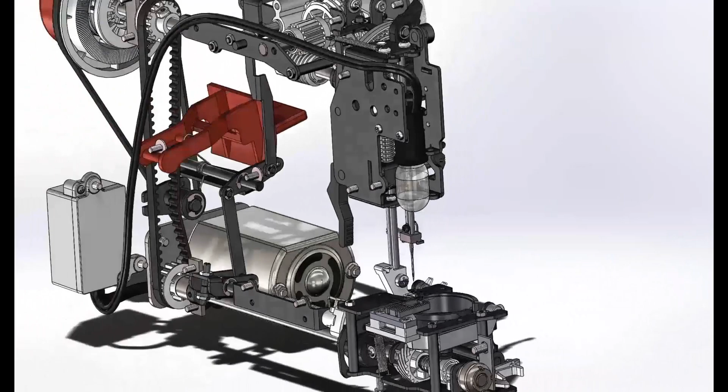When zooming in on the presser foot assembly, we see that this handle uses a cam and follower design to raise the foot away from the fabric.

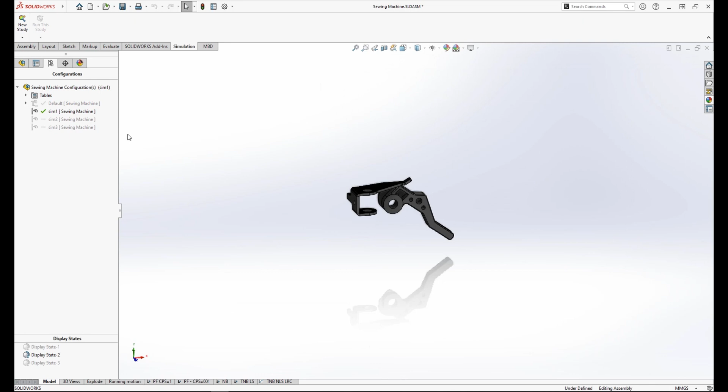The follower is held in place by a strong spring that holds the fabric down while sewing. We want to make sure that the spring is strong enough to keep the pressure on the fabric, but not too strong, making it difficult to raise the lever. We'll need to test multiple spring stiffnesses until we get it right.

Since there's a sliding contact, we could see some long solve times when we run the analysis. But now in SOLIDWORKS Simulation 2023, there's a new adjustment for contact penalty stiffness. This will trade some contact pressure accuracy for faster solve time.

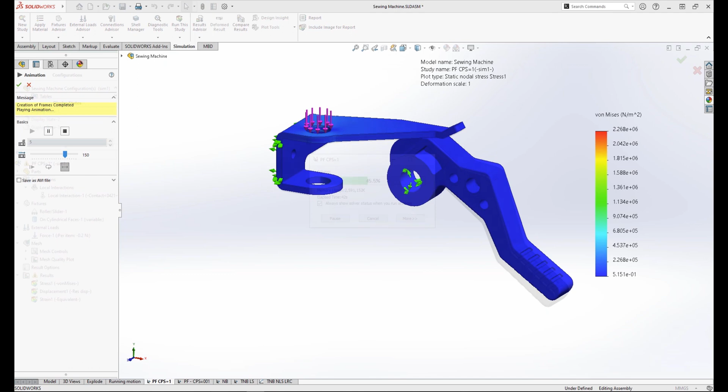This is great for testing out complicated assemblies or running multiple iterations, searching for an optimized design. In this head-to-head comparison, when the contact penalty stiffness is set to its lowest value, this simulation runs significantly faster.

Looking at the needle bar assembly, we want to ensure the needle clamp is strong enough to take on the repetitive forces from the needle. To simplify this assembly, we'll remove these set screws from the analysis.

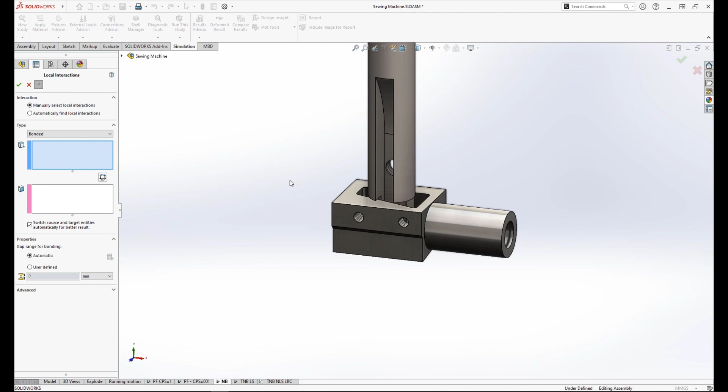New in SOLIDWORKS Simulation 2023, we have more flexibility when creating bonded contacts between non-touching faces at extreme angles to one another, like the threaded holes for these set screws and that flat cutout on the needle bar.

The upper shaft assembly has several plastic injection molded parts with complex geometry which could require some advanced meshing and mesh interrogation.

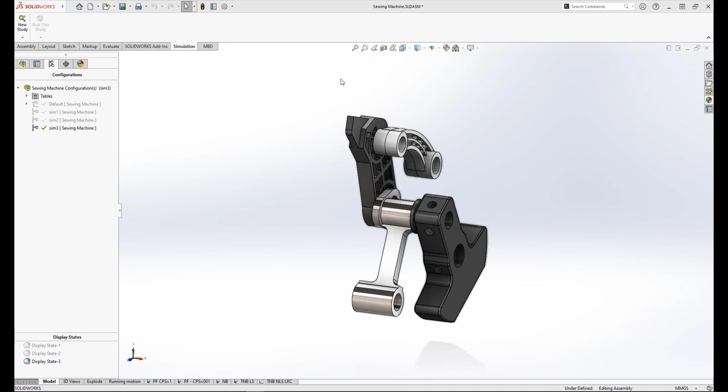New in the Command Manager is the Diagnostic Tools flyout menu, which provides quick access to important tools like mesh quality diagnostics. We quickly detect some poor quality elements that will require mesh refinement to ensure accurate results.

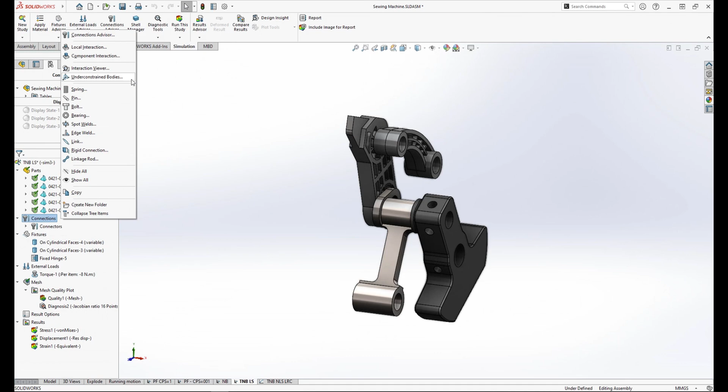For SOLIDWORKS Simulation Professional users, the Under Constrained Bodies command has been greatly improved. The solver now performs a singular value decomposition, which is much faster than previous versions. We'll also see far more realistic feedback of complex under constrained systems like this thread take-up mechanism.

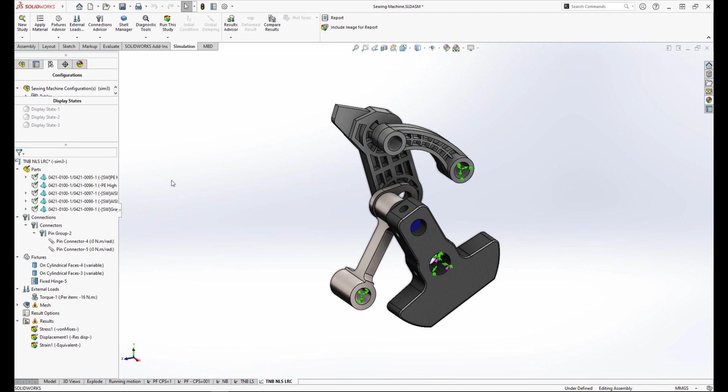And for Sim Premium users, the linkage rod connector, which was introduced last year, is now available for nonlinear static and dynamic studies. It'll work perfect here to help simplify the analysis and speed up runtime. Changing end conditions, offsetting the link, and dimensioning the rod will replicate its exact function in the analysis.

SOLIDWORKS Simulation 2023 will speed up the analysis process with new enhancements for every designer. Contact problems will run faster than ever, bonded contacts between non-touching faces are more flexible to use,

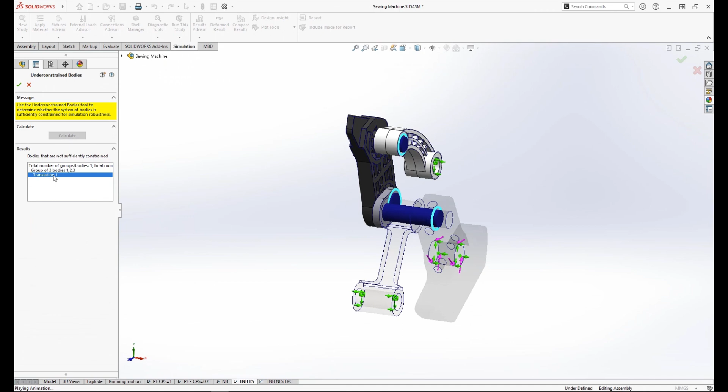and enhancements to SOLIDWORKS Professional and Premium allow for quick investigation of boundary conditions and powerful simplification tools to get your job done fast.